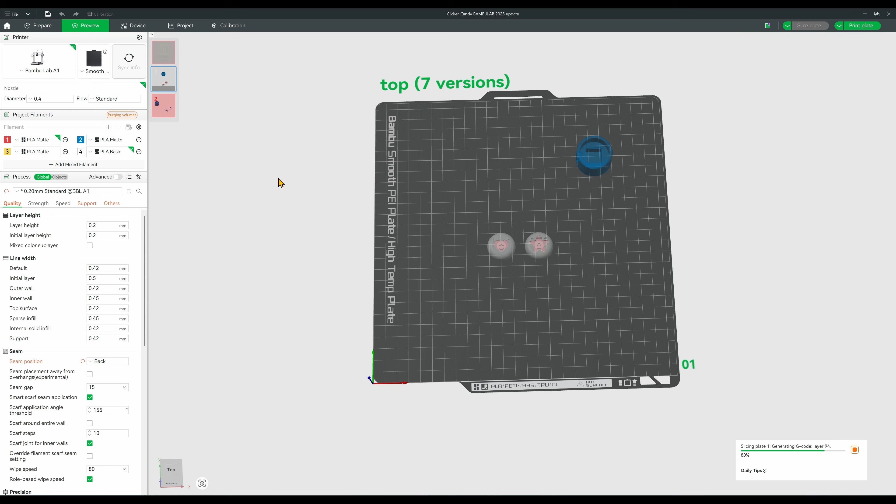So we have a few color changes and we have a model printing time of about 22 minutes. That's not bad. Now we can't have clicker tops without a base, so let's drag one onto the plate. Let's go ahead and do a preview now and see what's going on. Now we see that there's 41 filament changes and the model printing time shoots up to 1 hour and 46 minutes, almost 2 hours. That's no good. That's because it has to do a ton of changes between the blue and the white and red, and that's not something we want.

So a way to get around this is to print each one of these things individually, so they're treated separately, so that the printer prints one fully, then goes on to the next, and finally to the last one.

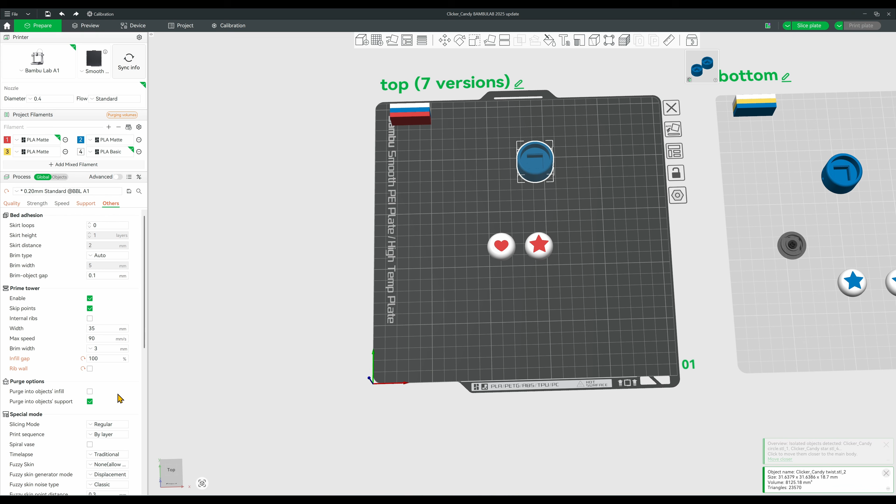So how do we do that? Well, make sure we're in global here, and then we go to others, and we go here where it says print sequence, and we go to by object.

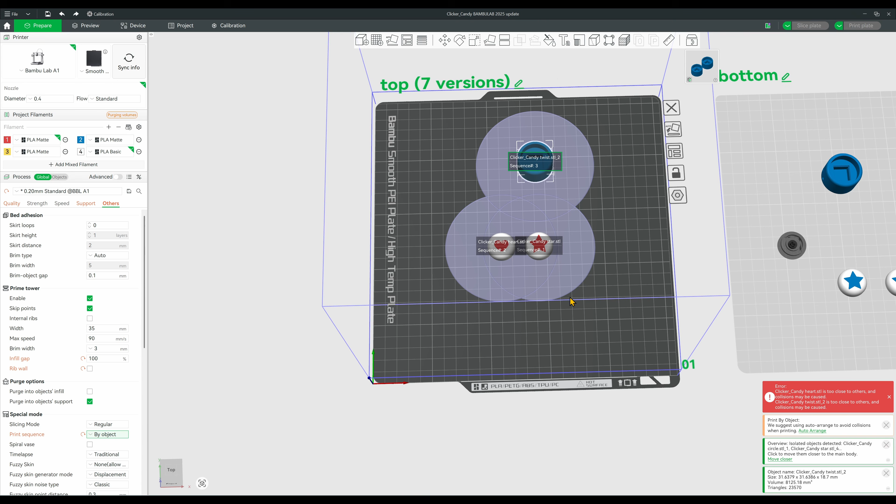Now the software will give us a little bit of a warning here. We still want to do this because we don't care about time lapse. Now, the big error here says basically everything is too close to each other, and it shows us the perimeter of each item.

So what we have to do here is move them aside, and now they're no longer overlapping. Another way to do this is you hit this Arrange Objects on Current Plate button, and it knows that you're in by object mode, and it rearranges everything on its own.

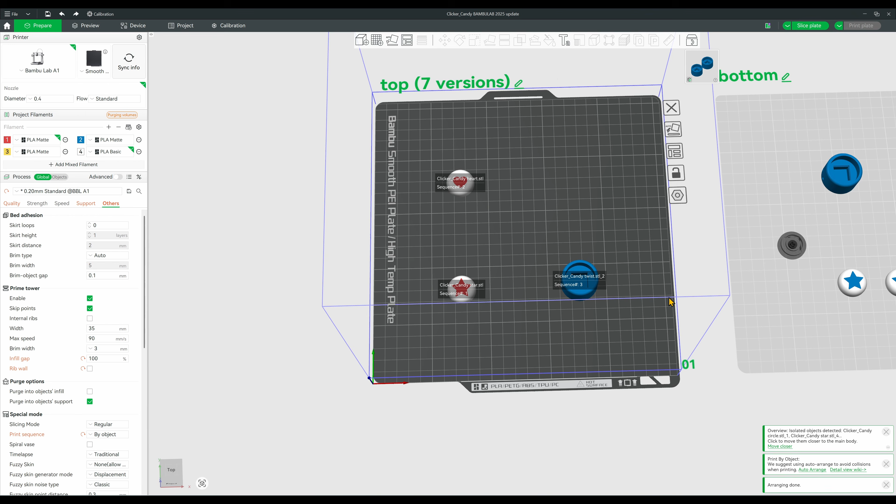Now let's take a look at the preview here and see how long it'll take. Now we're going back to only 10 filament changes and only 42 minutes to print this. And that's kind of what we want. We want to be able to print each object individually and in their own colors without having to do any color changes between like the whites and the blue and the red and the blue.

Now, you also noticed that the prime tower disappeared, and that's because we cannot use a prime tower when printing by object, because if you think about it, it wouldn't be able to do a red and a white, but then have a second object that has their own sets of colors and have a second prime tower.

I suspect at some point Bambu should add this feature because it does make sense, because you don't want to, even when you're switching from one set of colors to another set of colors for the next object, you're going to have that filament stay in the print head unless you do the purge correctly, which you can handle on your own here.

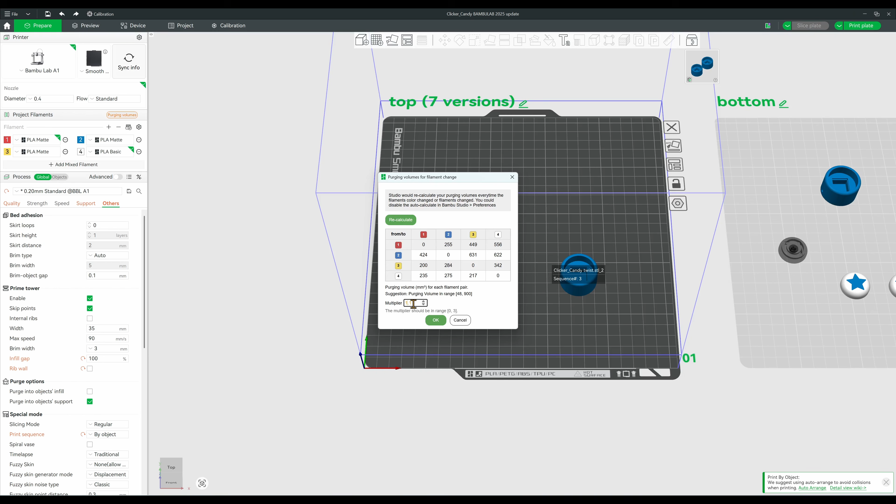So if you know you're going to be switching from, let's say, a white to a blue, you know you're going to get a lot of that white, or vice versa. You're going to get a lot of that color bleeding into the next, so you can always change that number here.

Now, let's go back. Now, let's say we want to, since we have two tops, we want to print two of these bases. So let's go ahead and clone it.

Right now, we see once again we have the error that everything is too close to each other. Now it doesn't really matter. We can move it aside and then that warning goes away, or the error.

But the right way to handle this, especially if you have a lot of items on your plate. So let's say you had another one of these here, and suddenly you don't have room to move this one in here, right? And I mean, there's probably a way to rearrange these. It works. But imagine that there wasn't, and these things were too close together, right?

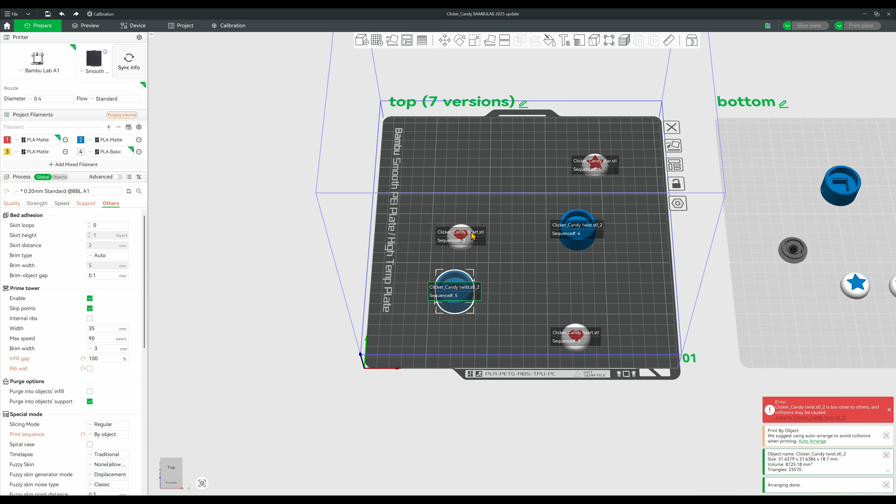Let's go back to the way they were actually. Put them back here because it's easier to think about it that way.

Now, what we want to do is we want to actually merge these two into one single object so that they get treated as one, since they're same color and same situation here with the two hearts, right? Because they're going to get printed the same.

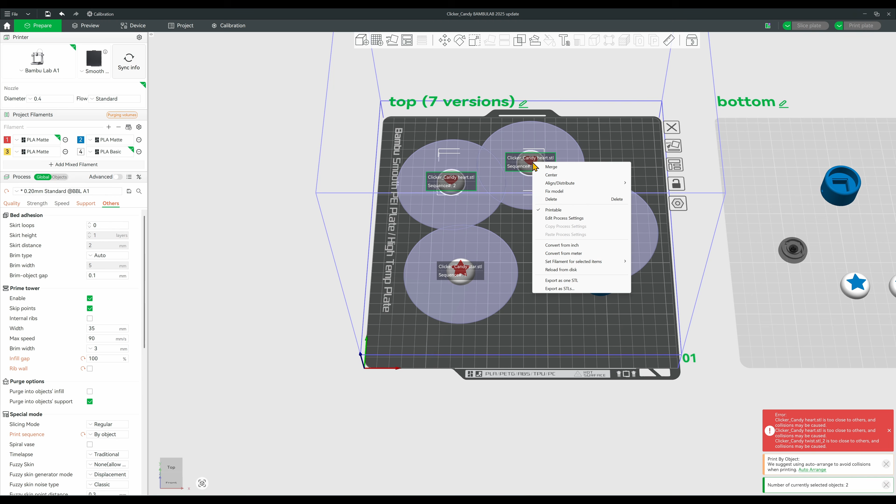So we can actually select both of those, right click and hit merge. And now they're one object. Same thing here. Click on this one, click on the next one, holding down control, and we'll go merge. So now these two are one object. You can see how they're moving as one and the perimeter is on each one of them, right?

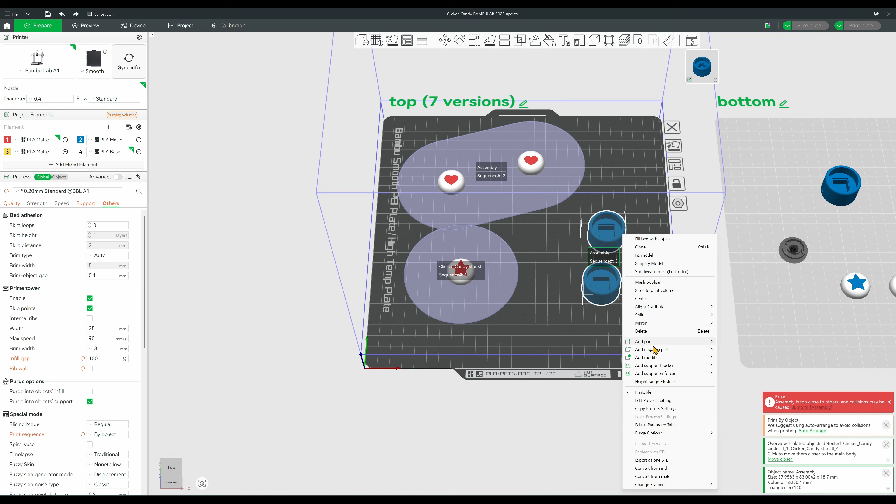So what we want to do, like theoretically, if we want to do it the right way, let's go ahead and split these up again into objects.

What we can do is put them as close together as we can, and then we merge them. So let's click on both, merge.

Let's do this one, and we're going to go split. Where's the split? Here we go. To objects. Unfortunately, what happens here, and this is a good thing to know, is that all the pieces end up splitting out, right?

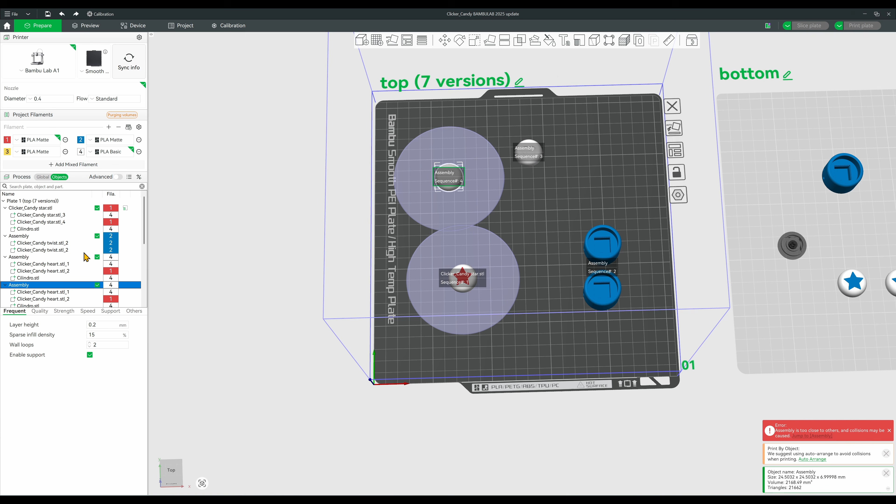So let's go ahead and put these together again, and then let's put these together again, and now they're two individual objects. So what you wanted to do, and I actually screwed these up because once you split them, the problem is that they go to the plate.

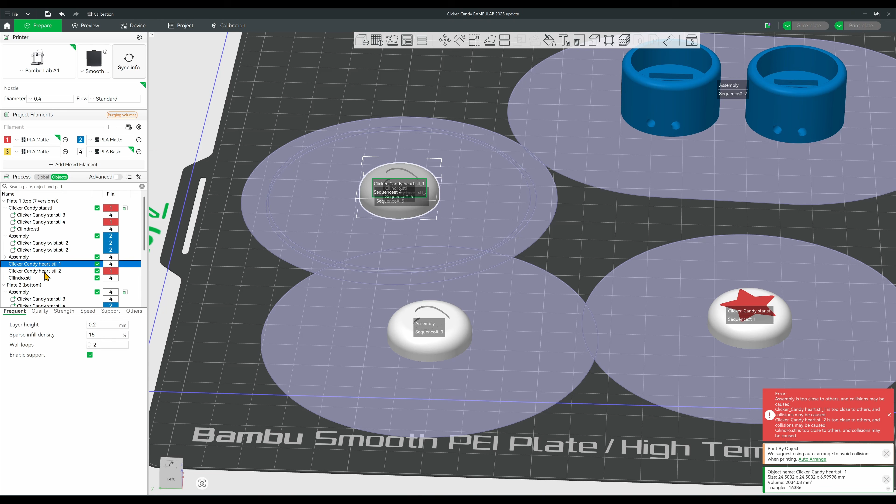So let's go ahead and split one up again just to show you. So what's happening is, let me move the top part out, which is this. And what happens is the objects get all placed on the bed. So they moved from being on top here to being on the bed.

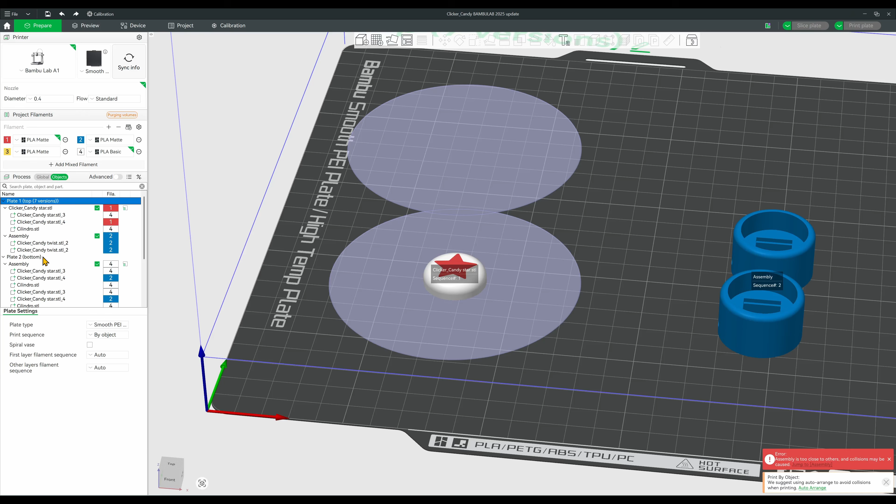So let's go ahead and just delete all of these. Go do it from here. Delete, and delete that one as well. And let's work with this here. So we have 4 of them now.

And again, if we were just doing this without the bases, it would be fine because we could do it by layer. Since we want to print these bases along with the tops, what we can do is we can select all of these.

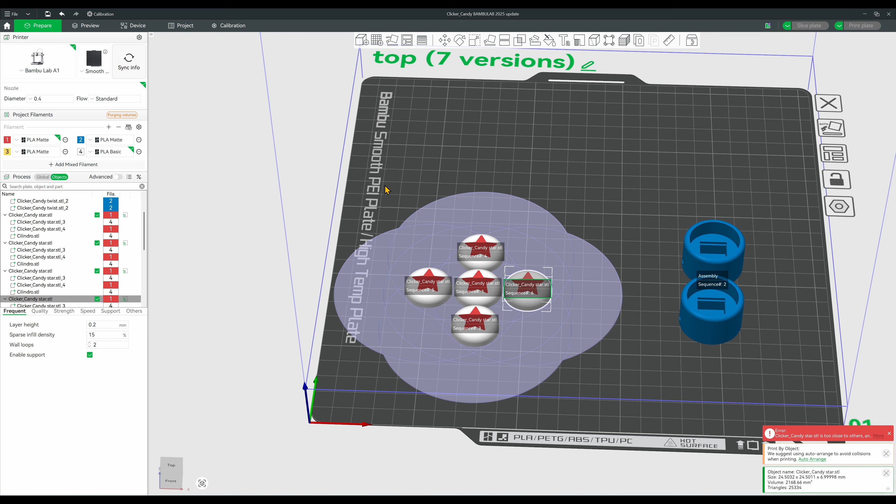Select all of these here. Let me go over here. And these are the bases. Let me go over here. I'm going to select all of these.

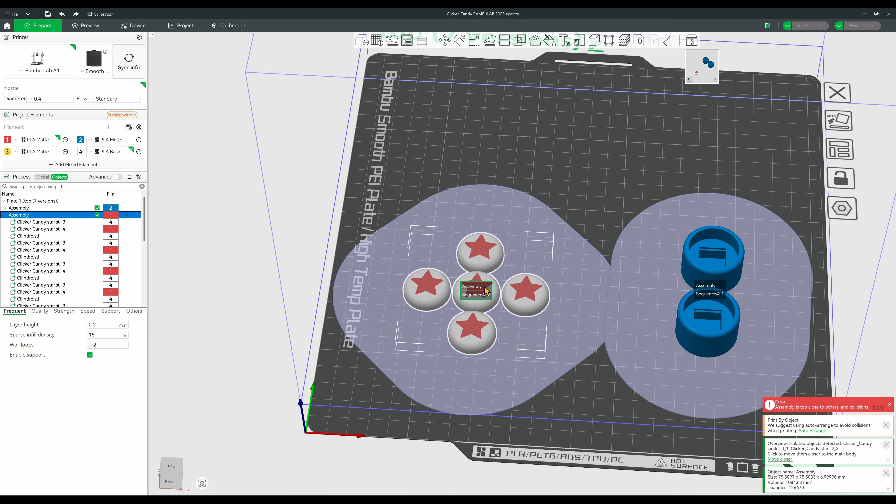And this one. And we're going to go merge. So now they're treated as one object. Now, just move it out of the way. Now these are really 2 objects.

So when we go to slice, only 4 color changes and a total of 56 minutes, and we're going to get all of these things printing together. These are going to get printed together. Then after they're done, these 2 are going to get printed as one object as well.

Now, there was also a question about heights. So what you'd want to do is you want to print the tallest thing last. Because what's going to happen is, if you print the tallest thing first, there's a chance that the gantry or the printhead will actually go and hit the taller object as it's printing the smaller object.

So how do we guarantee that these go first and these go last? Because if you look at how it's going to print, it's printing these tall ones first, and then second, it's printing those short ones. But we want the opposite, right?

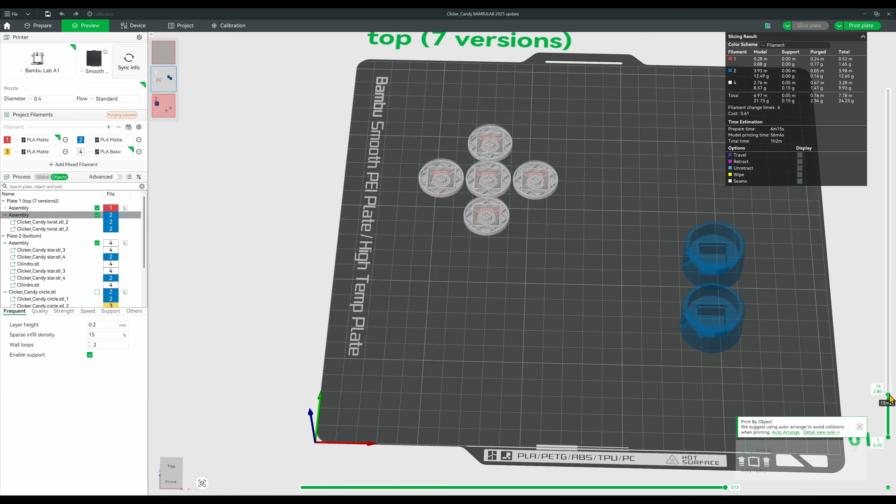That's simple. All we have to do is rearrange them to print second. And now, go ahead and slice again. And if you look, we'll start off with the shorter items and then end off with the taller items.

Hope that makes sense. If you notice, there's a little pop-up here that says we suggest using auto arrange to avoid collisions when printing. That's kind of what we did manually, but there's an auto arrange button here as well, and that's the same thing as hitting the one that's on the plate right here.

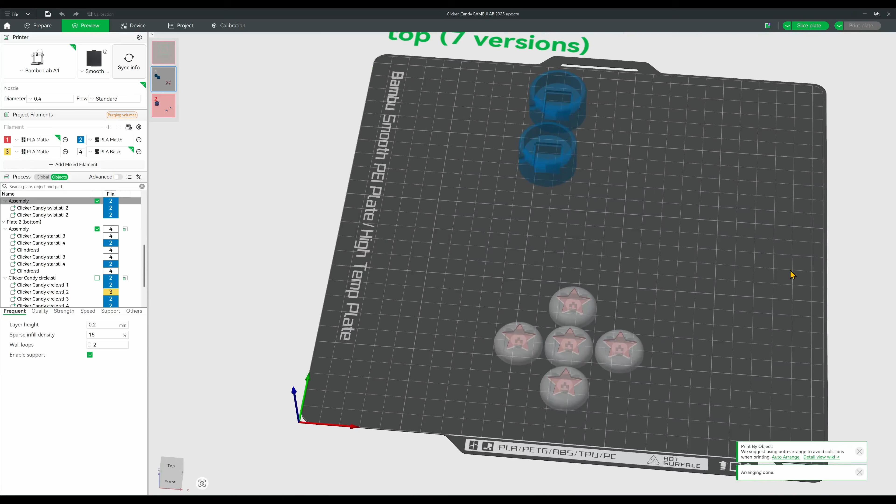Now let's take a look at the Detail View Wiki. Here you can find a lot of information on how this works, and particularly how to deal with taller items.

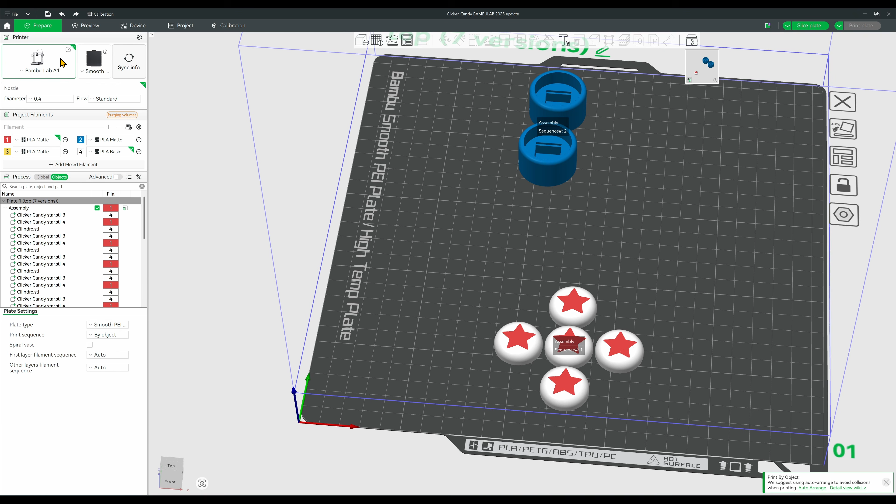Now, if you want to know what those limits are, you can hover over here where your printer is, and you click on this Edit Preset button. And if you notice here, there's extruder clearance. And that's actually what the limits are for when your gantry or your rod will actually hit items when they're too close to the rod.

These are not editable unless you override the actual preset. So if you create your own preset, you could override these, but for the default ones, these are kind of set for you.

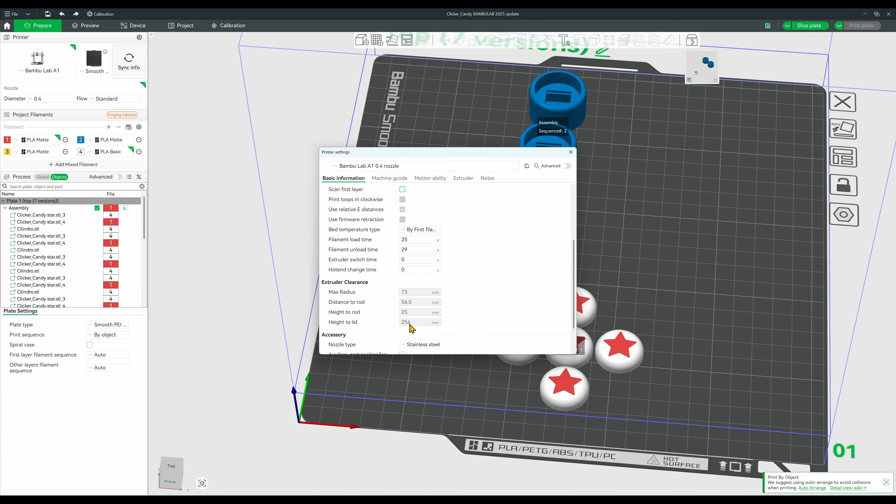Another quick note, let's say you had another object that you were printing as well. And let's just go ahead and put these here. Let's do a rearrange so everything gets properly placed.

Now let's say you're in the middle of a print and something screws up. So let's say these red stars start messing up and they're not printing correctly. Since they're the first ones to get printed, you might need to say, okay, now everything is going to mess up, so you might stop the print.

However, since they are now all individual objects, what you could do is in the app, you can stop this from printing. You can skip it, at least in the Handy app. So you can actually tell it to skip, and it will continue and print these two objects, and you'll have the successful print, and you'll need to reprint these separately, but you won't need to stop the whole print.

Anyway, I hope that was helpful. Let me know if you have any more questions on this feature, and I'll answer them in a future video.

Also, I haven't been able to post much due to some health issues that came up right after my last video, but I'll probably start posting more now since I just got laid off last week and I find myself with a lot more time on my hands now.